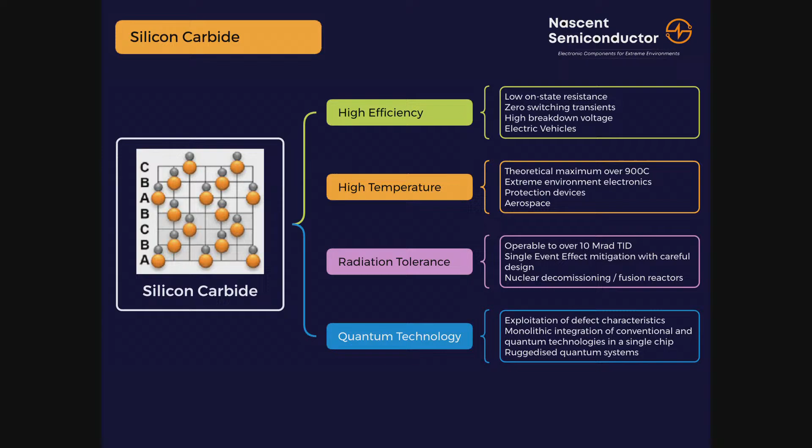And then, finally at the bottom, the brave new dawn, quantum technology. This is the only way you can put semiconductors and quantum together to make an integrated hybrid conventional quantum system, and we can open the door. Quantum comms, quantum computation, quantum sensing, all in one chip. There's no other material system out there that will allow you to do that.

So how? Well, this is how. Silicon carbide is a stoichiometric alloy of silicon and carbon. Imagine you're playing with your little Lego bricks as a kid, and it looks like the stuff on the top left. Now, obviously, silicon's blue and carbon's red - that's how I draw electrons and holes when I teach. In the top left corner, you see a silicon vacancy - there's a blue ball missing. And that shows up as a defect down here.

And this is... No, remember. Yeah, it's all right. Point the other one. Press that one. Point over here. Right. So about here, got really dodgy shakes this morning.

There's an energy difference in our defect between if we populate it and if we don't populate it. So we've got missing atoms like vacancies. There's also carbon vacancies, and we get extra atoms stuck in. Somebody was talking to us earlier about where the carbon goes in silicon carbide when you oxidize it. This is where it goes - it becomes a carbon interstitial and it wrecks your MOSFETs.

This is why silicon carbide MOSFETs are not as good as they should be. They've got all kinds of problems like threshold voltage instability and carbon interstitials. Some good work came out of Japan a few years ago on this.

We also end up with a situation of point versus extended defect, so you've got VC, VSI, and CSI VC - carbon silicon divacancy and a silicon carbon site with a carbon vacancy next to it. There's a whole zoo of these dratted things, and I spent 20 years of my life working in semiconductors

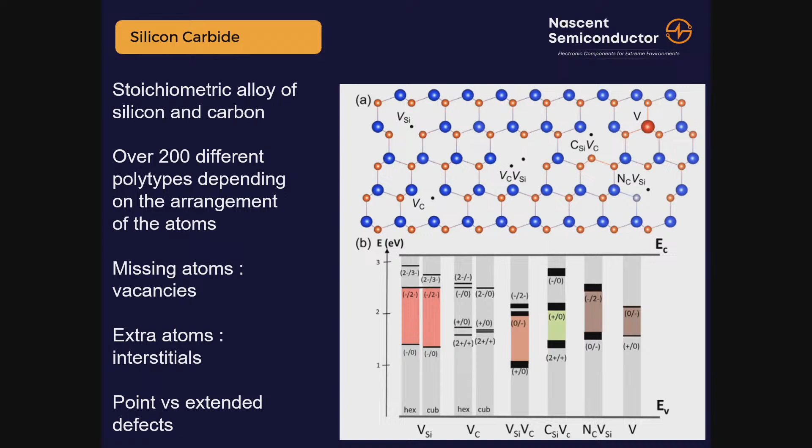trying to get rid of them. You put them in accidentally by doing ion implantation, contact annealing, and they'd be a pain. Now I've realised that I've been doing it wrong, and I should have been embracing these little darlings and doing fun things with them. So this is the quantum bit.

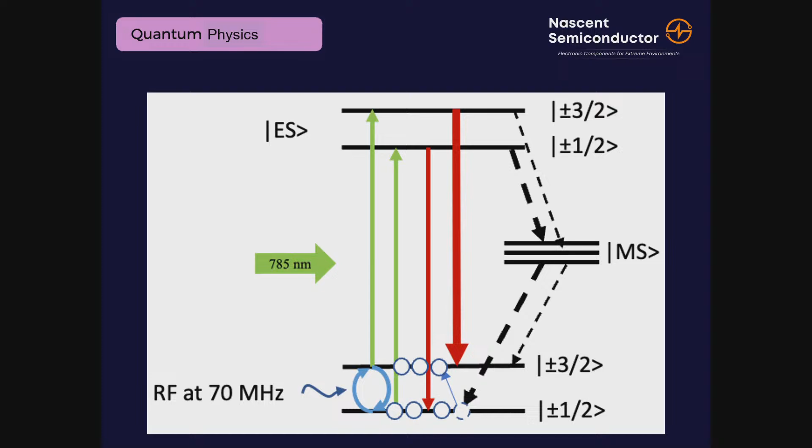Down at the bottom, you've got two energy levels, a spin half and spin 3/2 energy level, separated by a small energy that's resonant with an RF signal at 70 megahertz. We can shine a laser on this, a 785 nanometer laser, infrared, not much fun in the university because health

and safety people really don't like you. We pump all the carriers up to the top, so we put our defect into excited state marked by ES, and then it relaxes back. It's an unstable dynamic equilibrium.

There's two options. If you're in a spin 3/2, it drops back to the spin 3/2 ground state, the big red arrow, and that's the dominant transition. That gives out light - this is a photoluminescence type measurement.

If you're in the spin half, chances are it drops into this metastable state and drops back out at the bottom. This is a dark transition. We can't see it, we've got no idea that it's there. We know it's there, physics tells us it's there, but we can't actually see this. It's called the dark defect.

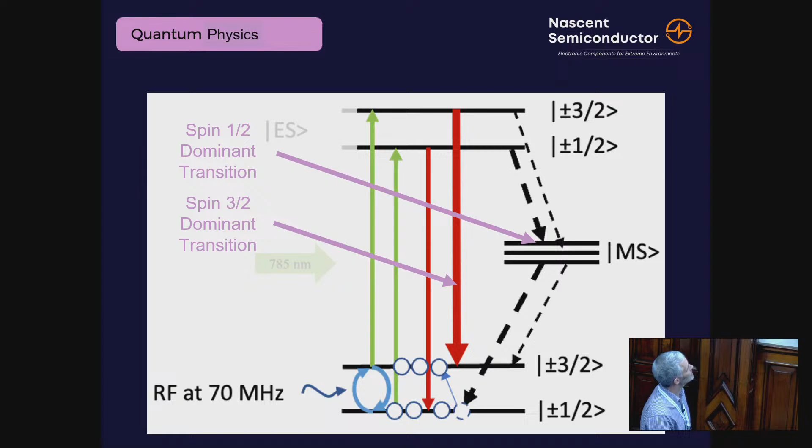So if we're doing this for real in an experiment, those are our two dominant transitions. In order to measure it, we want to populate the spin 3/2 state, so we apply this RF signal at the bottom. We sweep the RF field, and when we get to the point where RF equals 70, we see a nice big spike in our resonance.

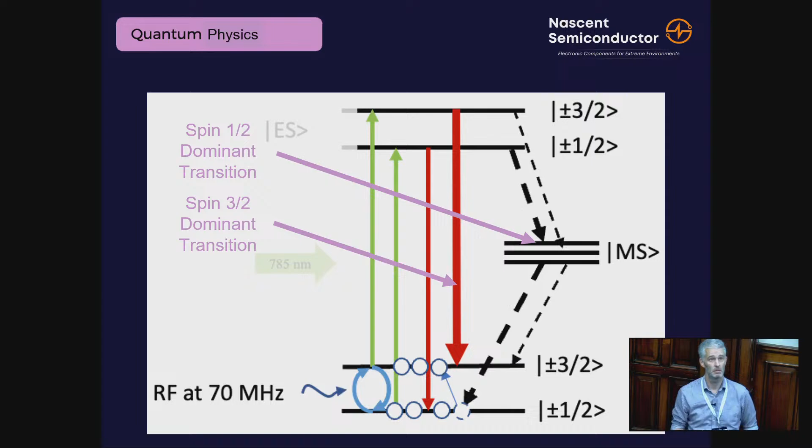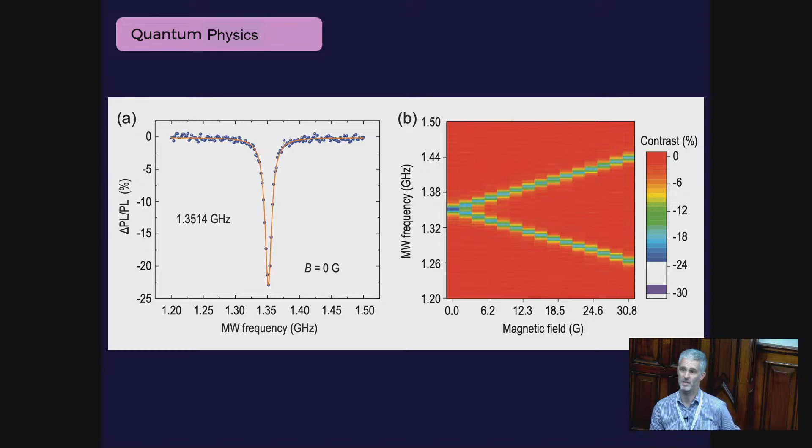What does that mean? Well, we've got a very narrow line width. Actually, if we optimize that, it's about 10 hertz wide at a gigahertz. It's a very, very sharp transition because it's quantum - you're moving from one quantum state to another.

What does that mean? Well, precision timing. We've now got a system where we've got a line that's very, very tightly defined. Very little uncertainty, no jitter.

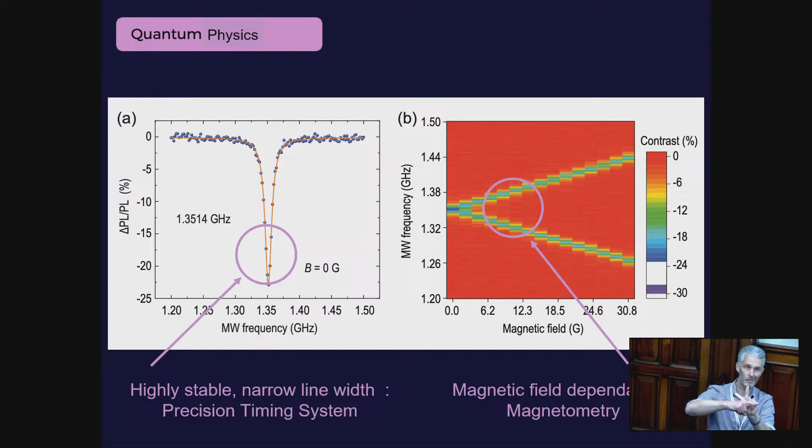On the other side, we've got magnetic field dependence - we've got a magnetometer. The clever thing about magnetometers on this is because silicon carbide is a hexagonal close-packed lattice, that direction and that direction are not the same. So actually with one pair of defects, I can look at that direction and that direction at the same time. I've got a perfectly orthogonal magnetometer with one sub-micron feature size, all on the same system.

Let's start with the laser, a little bit of beam steering. It goes through a dichroic mirror, large objective lens, onto our sample, which has got an RF signal across the top. We then collect as much light as we can through our high numerical objective lens. It's reflected back off here, and we send it into a single photon counting module.

This system is about a metre big. It's half an optical bench, weighs half a ton, and it's not exactly portable. The great thing about quantum is we need to get it out of the lab.

I once sat in a meeting with EPSRC, and one of the things they talked about is what we're going to do in the future. I said, we need to get quantum down to that. All I got from people saying, you can't say iPhone because it's trademarked. Yeah, right, point still there - when you can put it in your pocket, it works. That phone has more computing power than the US national government had when I did my PhD.

What do I use it for? Checking Wednesday's football scores, reading the news and watching Piano Playing Cats on YouTube.

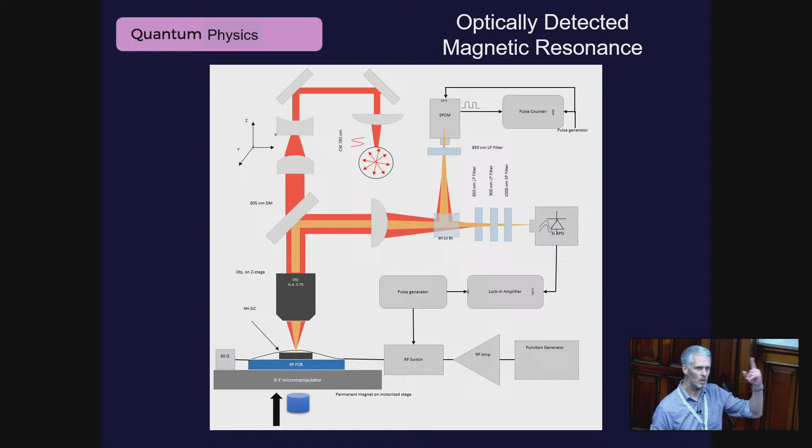What a waste. If we want to do something with this, and I want to set quantum free, we let the engineers in.

And we look at that and say, yeah, okay, you can do it optically, it's beautiful, it's wonderful, it does all this stuff, but you can detect that electrically because you detect the electrical transitions and you can do this. You can actually get a current out of it. Oh, hang on, we've got a current, so we can put an amplifier on it. And as soon as we do that, we don't need all this ancillary stuff.

Try that again. No, go the other way. All this, I'm used to working in the university where I can actually reach and point at the board, in case you're wondering. You don't need all this ancillary stuff up here.

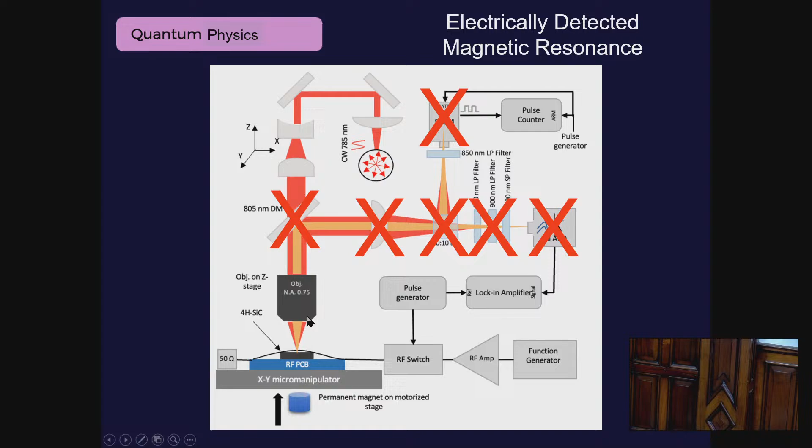All I need now is a laser fastened into an objective. I could do this with a fibre optic laser, and actually I put an amplifier across the back of this. I can build that RF generator on chip. I can build that amplifier on chip. I can't do the laser. Silicon carbide doesn't do very well with optics. But everything else you see on there will fit on one 3mm square piece of silicon carbide.

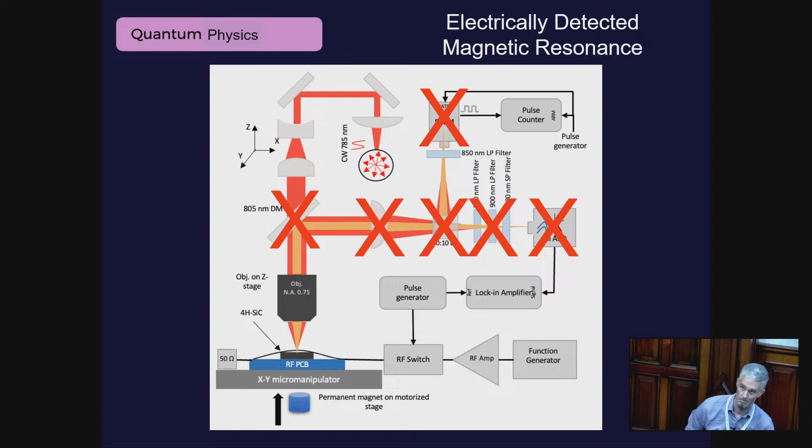I've got a magnetometer in my hand that will fit in your iPhone. You can't do this in any other material system.

What does this let us do? Well, once we get hold of this, we can build a magnetometer. Well, just kind of showing you that. A little hand wavy, but it's there. And we can do picotesla per square root hertz. And the main interest in this at the moment is anomaly detection.

If you don't read the right type of novels, this means detecting other people's submarines where we don't want them to be. That's basically an anomaly. We can do single photon generation.

Okay, so if you want to go out and do comm systems and things like that, this technique will also produce a single photon system. So do other systems. This is not particularly unique to us.

Position, navigation and timing, atomic clock. We can build a fully ruggedized atomic clock that you can drop, bounce, throw around. I watch Paul laughing now. And it will still work. You can't do that with standard quantum technology. It's very fragile. Our stuff, yeah, not a problem.

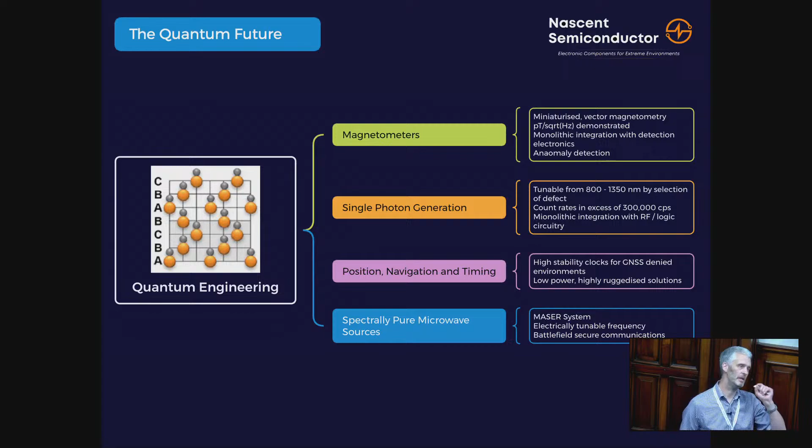Spectrally pure microwave sources, building masers, and there's a lot of interest in that for things like battlefield secure comms. You've got a very spectrally pure microwave source that you can tune electrically. There's a lot of interest.

Where does that bring in us? So a couple of moments just advertising us, because frankly, we're wonderful. We're doing magnetometry, we're doing a lot of work in position for GNSS denied environments.

There's a lot of money at the moment with the UK government. Sovereign supply chain, what happens if GNSS is turned off? I had to explain this to my son on the way home last night. The trains stop. Well, okay, I came up on Northern, that's not a major threat.

Navigation, and it's not about Uber, and it's not about Domino's, this is about everything else. Bank transfers, national grid synchronization, they all work on atomic clocks. And in case you're wondering about the railways, it's the signalling.

And one of the comments from somebody is, if you work in distributed sensing, the person who knows the time wins.

Timing, comms, training. Oh, the bottom one. Just to go back to some of the things that have been out there.

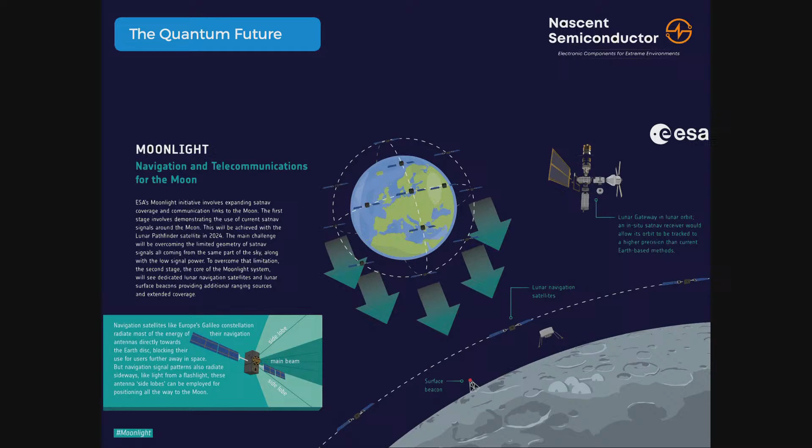We want to go to the moon. There's a few people I'd like to send one way, but we're off to the moon.

What's the time on the moon? It's a facetious question. I can see Sandi Toksvig now with her thumb on the button in QI. I go, what's the time on the moon? If we want to do autonomous landers, the Chinese have just landed on the dark side. It's a fantastic result. We need to do autonomous mining, autonomous landing. We need power networks. We need Uber. Again, you know, how are we going to get around to the moon without Uber?

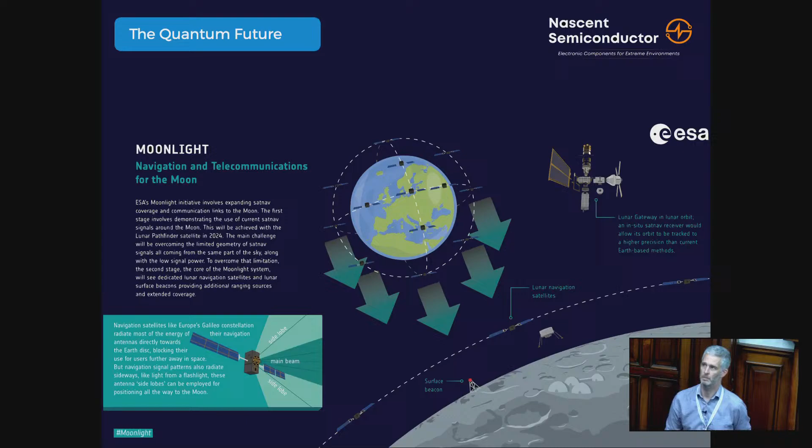We can't do this unless we have a timing system that gives us navigation, that gives us position. We've got a fully ruggedized, landable system that you can put on the surface of the moon. It's also small and low power, so you can fly it over the top of the moon.

But we'll come back to skills. We're working with Durham, which is my part-time job, to produce targeted training for engineers looking to develop quantum in the real world. Over the years we've developed training for people in semiconductors. We can start with GCSE chemistry and take you to PhD level, in 3 days. We're now taking this out, and we're going to teach engineers about quantum. Why does it matter? What does it matter? What will it do for you?

Our first product on this will basically be quantum for managers. Why does it matter to your company? What should you know about this? When the engineers use the word, what do they mean? We're taking bookings - obviously a little bit of a sales pitch there.

So where are we? Well, the integration of quantum with wide bandgap semiconductors is a unique opportunity. There's no other material system out there that can do this. I've been looking to do this for a long number of years - checking the audience. When I worked for my previous university, I tried to get this off the floor and it didn't work. So the technological maturity of silicon carbide is really quite good. It's not silicon, thank God, but you can buy wafers, you can do processing, and now we can integrate the clever stuff with it and we can still put it through a foundry. We can go to a foundry in the UK and get them to manufacture quantum parts.

Miniaturized, ruggedized systems are being developed that will do everything we can imagine. And I'd like to finish by thanking the giants upon whose shoulders I stand, some of which are at the back, and some of which thankfully are not. And with that, thank you very much.

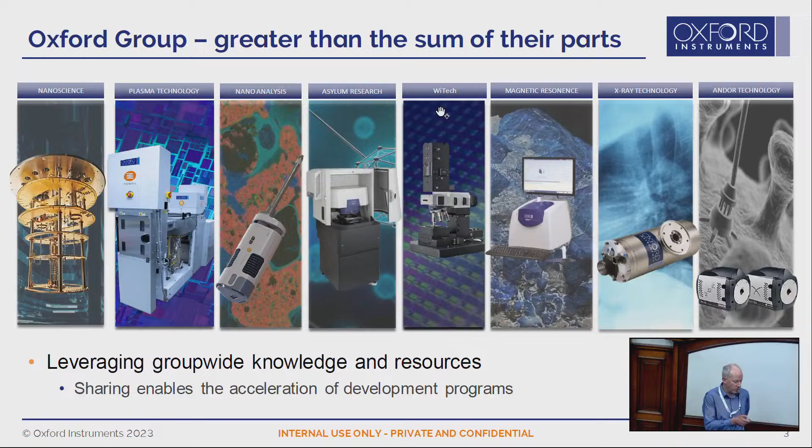The Plasma Technology division here is also involved in the semiconductor areas, particularly the nanoanalysis division, Asylum Research, WiTech, and I'll talk through some of the products that they have that are relevant for semiconductors.

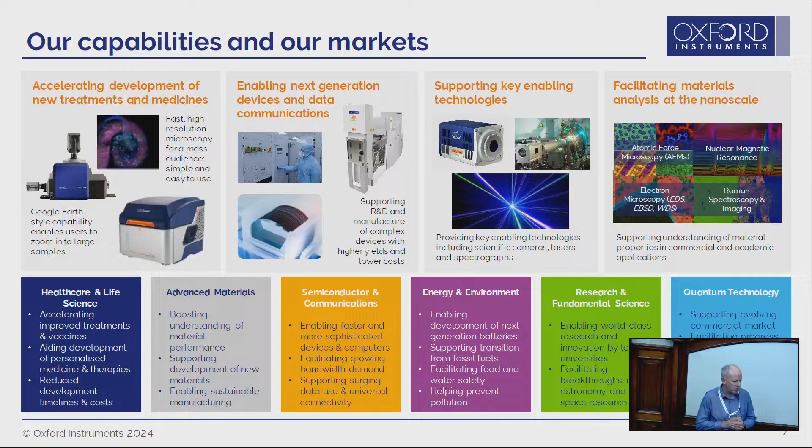The Plasma Technology division is really focused on enabling next generation devices in semiconductors, and I'll go on to talk about those types of devices that our equipment is being used to fabricate in the next few slides. I'll also talk a little bit about the nanoanalysis division and the types of analytical instruments that are used.

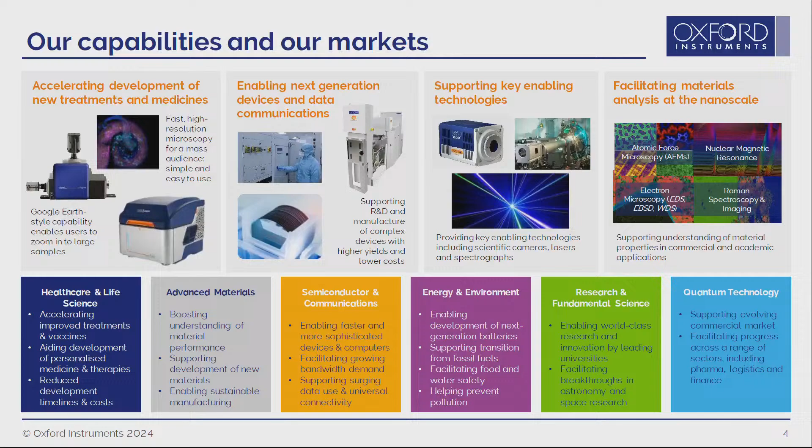Overall, Oxford Instruments' vision and view is enabling a greener, healthier, and more connected advanced society. Semiconductors is a key part of that. Quantum is already mentioned, but really across all these areas, the fabrication equipment that Plasma Technology is making is being used for.

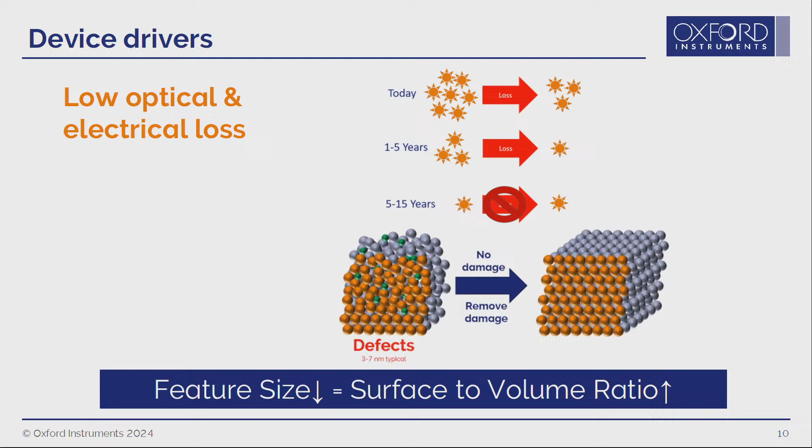So the different solutions that our equipment and our processes are for: I mentioned damage removal, also interface optimization - etching an interface, cleaning an interface, removing the surface layers, and then putting down a passivation to ensure we get a high quality interface.

We're also seeing demands for ever more advanced architecture features. I mentioned augmented reality - they're looking at a slanted etch, but also we see high aspect feature etches really trying to control the etch profile, the features, and then as these features get ever more complex, trying to deposit and coat these different feature structures.

So I mentioned the four main areas that we're looking into: discretes, devices, opto devices, 2D materials is also something that's very important, next generation R&D, and then also quantum technologies.

And all of these, the main fabrication technologies that we are focusing on is atomic scale processing - atomic layer etch, atomic layer deposition, plasma etch and deposition, and then also ion beam etch and deposition.

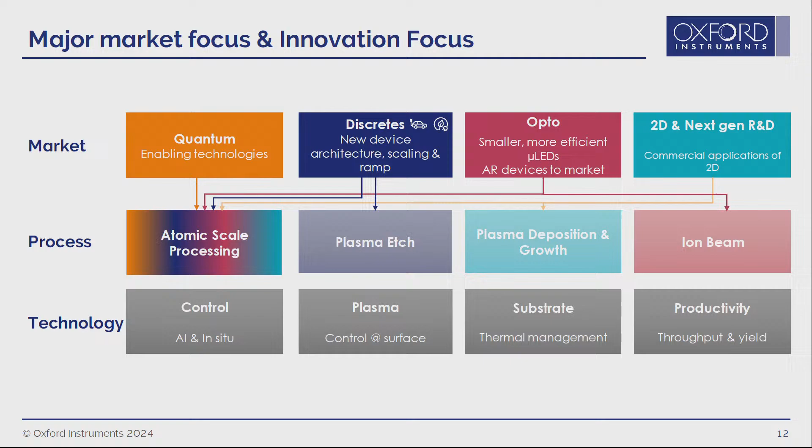And what's really important that we're seeing is control, and looking at use of AI and in situ monitoring, combining that with AI to achieve the control of our processes, controlling the plasma at the surface, and really managing the thermal budget when we're processing - all of that increasing productivity, throughput, and yield.

So a couple of examples. We've talked a bit about wide bandgap semiconductors, so gallium nitride, silicon carbide. On the left here, we have two different types of gallium nitride devices, normally off devices - a p-GaN HEMT structure and a recess gate MIS HEMT structure.

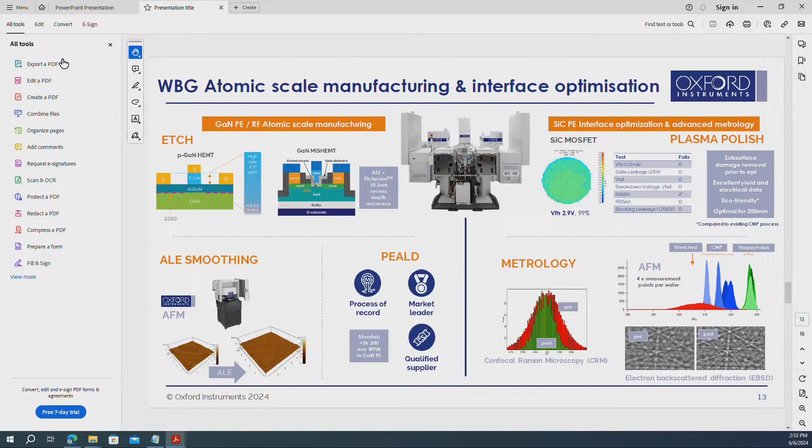And here, as I mentioned, the... oops, sorry. Did I put that back into... thank you.

So here, as I mentioned, in this recessed gate structure, we are etching a recessed gate structure of just 20 nanometers. And here, the control of the depth becomes very, very important when it's just a 20 nanometer etch. As well, when we're doing that etch, we need to make sure that the surface quality, the surface roughness and the surface quality, is as high as possible. And there we are choosing atomic layer etch to get both this control and also a very smooth surface.

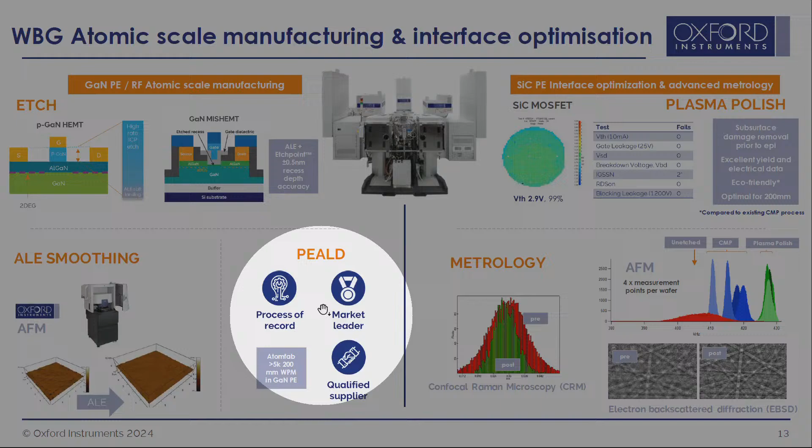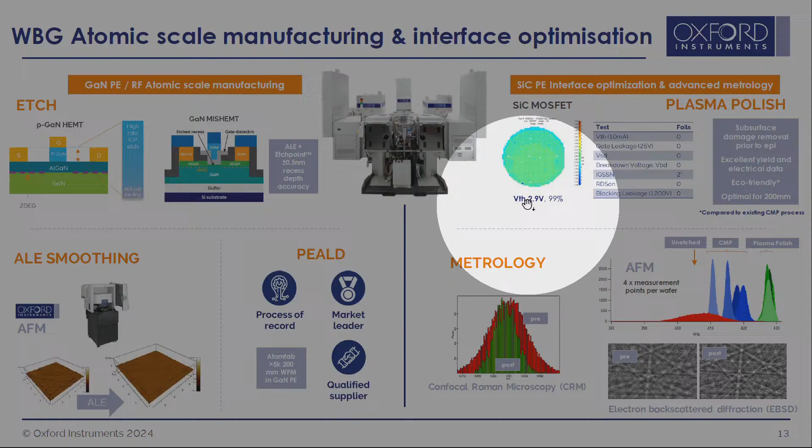And then once we've done that etch, we use plasma atomic layer deposition to put a passivation layer down. This is for a kind of RF type GaN device, or alternatively also smoothing in a p-GaN HEMT. On the right is a process we have for silicon carbide, an alternative to using CMP - etching the surface with a plasma to effectively polish the surface in a similar way to CMP, but removing the surface damage.

And we've characterized that both electrically, making devices with partners, but also using metrology such as Raman spectroscopy looking at the density, AFM looking at the surface roughness, and EBSD looking at the crystallinity of the surface - combining all these techniques to really understand the surface and how that impacts the electrical device results.

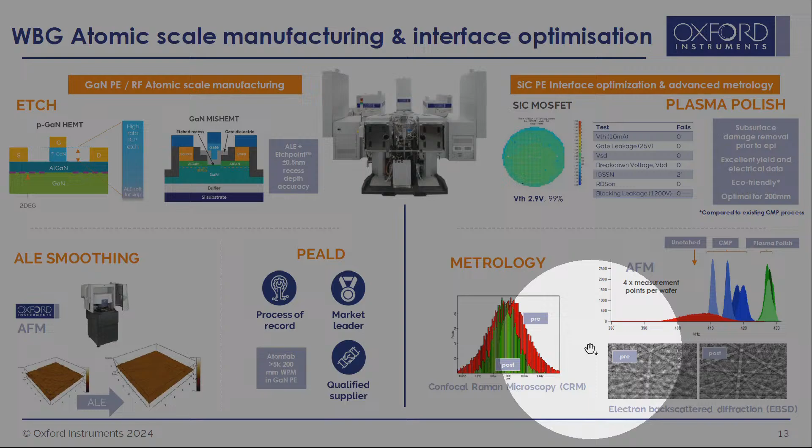This can be a very time-consuming process - to fabricate a device can take several weeks, months even, and is very costly. So we're always looking for short-loop methods, and hence the focus on the metrology to really directly and rapidly characterize the surface so we can try to understand what the impact will be on devices.

So I mentioned there the example of surface smoothing already, and that is where an etch can modify the surface of the device and of the structure, and really where we're using atomic layer etch to get that best quality of interface possible.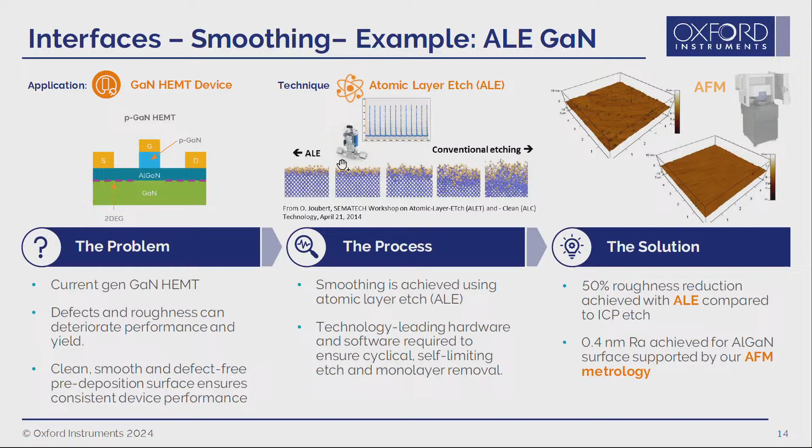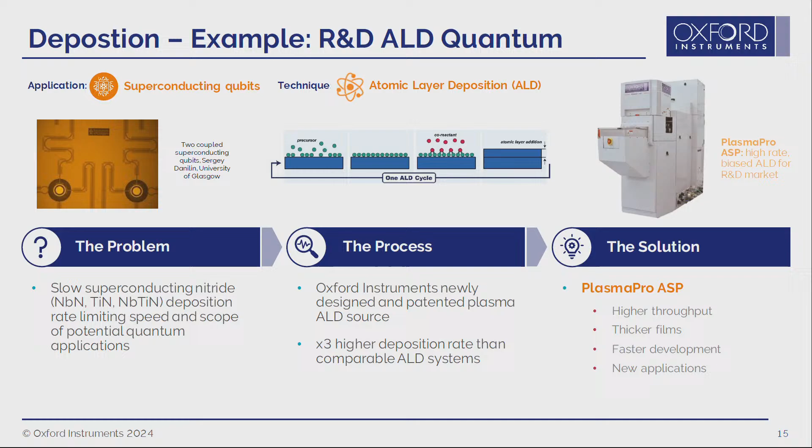So really different demands in terms of the structures and what it is that we're trying to etch.

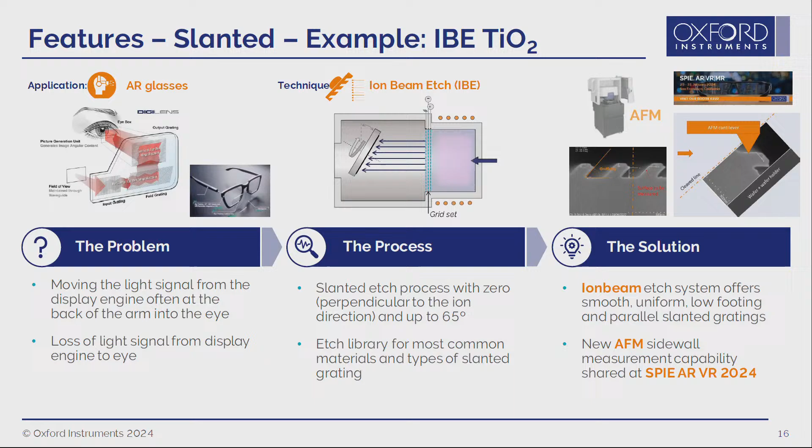So a summary there: we see the trends for the future of surfaces becoming much more important - surfaces, interfaces, looking at damage removal, interface optimization, and etching and depositing onto ever more complex features with higher requirements for their fabrication. Okay, thank you.

Time for one quick question before we move on. If everyone's... No? Okay, brilliant, thank you very much.

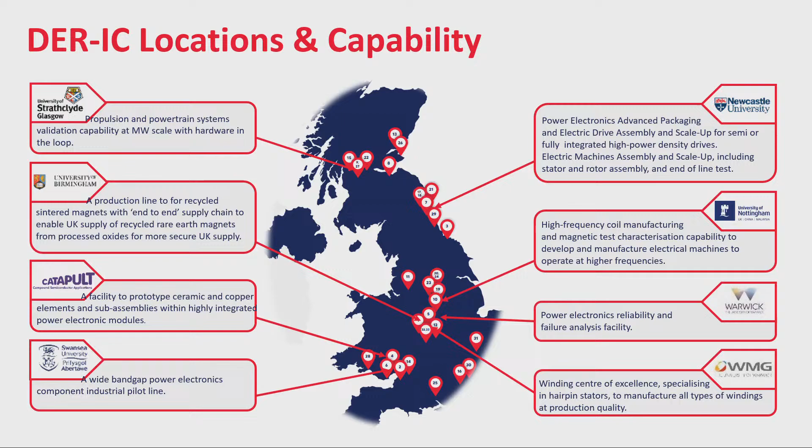In the northeast, we've largely got a power electronics packaging capability, and following that, we're able to take those packaged devices and integrate them into drive systems. We have packaging equipment which is industrial scale for packaging and also for surface mount PCB manufacture. If anyone's interested in how we use those devices, for example to drive electrical machines, we've also got capability to prototype, assemble and manufacture electrical machines.

The total investment to date has been around £45 million. The equipment we've got at our centre totals about £10.5 million. There was an initial tranche of funding, and we've just gone through the commissioning stage, and now we're starting to use that properly in anger.

Importantly, I'm also currently in a procurement phase. I have some additional funding, and I'm looking to spend that wisely. What I am here to do is support industry, not just nationally but also clearly in the northeast. It's great to build that relationship with the power electronics community and do as much as we can to support industry in the northeast. I need to make sure the centre I lead is as useful to as many people as possible. So because I'm in procurement mode, if people have particular needs for manufacturing process development or capacity, I'm all ears. Let me know, and I'm happy to consider suggestions as to how best to spend the money.

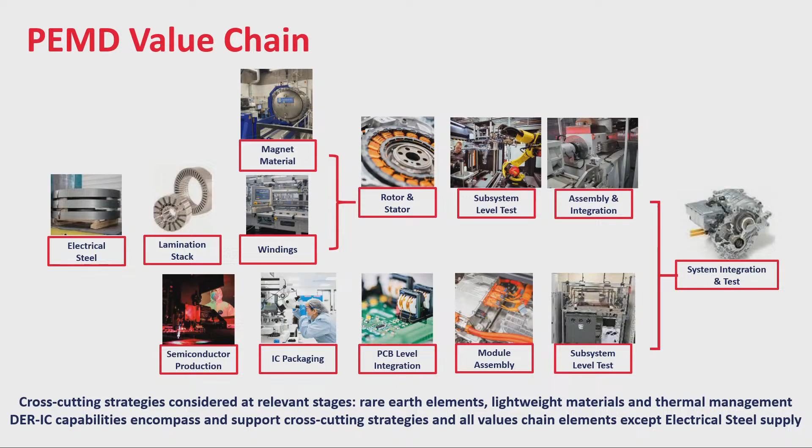If you look at what we have at our centre, we're located opposite the Nissan plant in the old SASME building. We might be moving from there at some point, we're working on that at the moment. It might not be the best location for us currently, but we're considering various options. Our current location is at the SASME building.

What we have there is open access equipment and staff who can actually use it. You can see our team there, it's a modest-sized team at the moment. We're currently recruiting, and I'm sure those of you also trying to recruit will know how challenging that actually is, but we've currently got a couple of new senior engineers coming on board, and we're also looking to recruit more people, particularly for our power electronics side.

But don't consider this as being DER in the northeast. We're able to call upon all of our partner institutions, for example Durham University is part of the DER network in the northeast, Newcastle University is as well, a whole bunch of institutions. We're partnered with people like OREC and so on. There's a whole bunch of capability we can call upon.

And if we can't find that capability in the Northeast Centre, we're also a national network. The four centres work together very effectively, so we're able to piece together, if we don't have the capability, a complete capability across the network with the other parts of the community. So it's a modest-sized team as we can see, but we're able to call upon much more expertise as and when we require it.

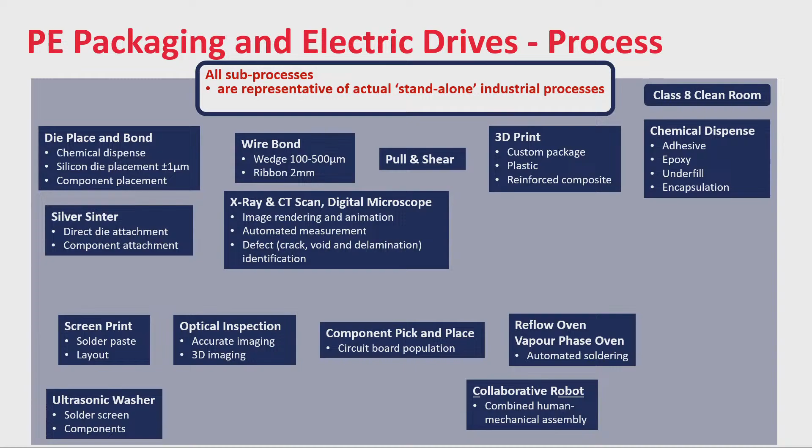Just to give a brief idea of where we are with our centre at the moment. Each of these boxes represents a bit of equipment that we've got. It's generally industrial standard equipment.

It's designed to follow on from where the CSA could take you in a device development. They're geared up to do just a few samples, whereas our equipment's specified to go into the hundreds of thousands of samples, if that's what we need. So it's proper industrial manufacturing equipment.

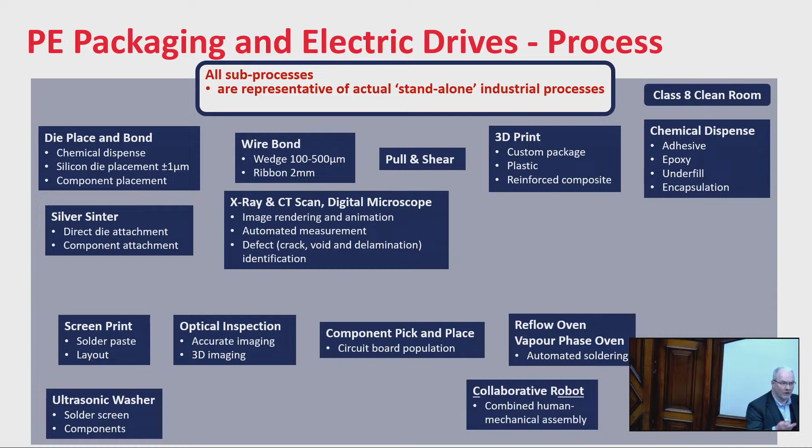These are the various different bits of kit that we've got and the various processes that we can play with if we're trying to help someone develop a manufacturing process. But the important thing to remember is that this stuff all fits together to give an end-to-end capability. The stuff we have at our centre is very much at the back end of processing.

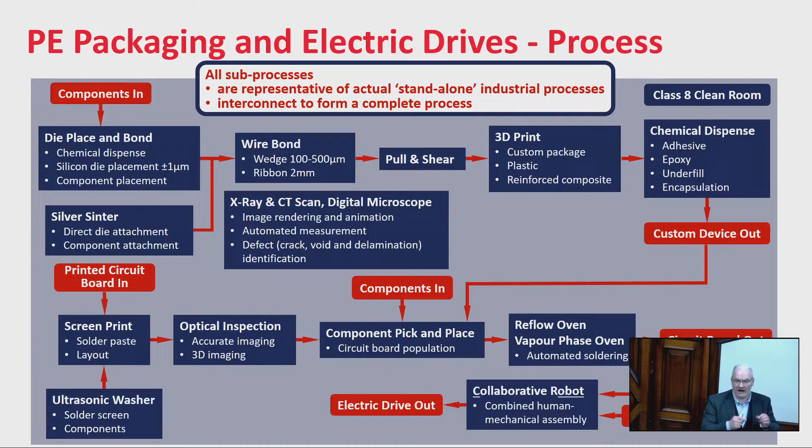We can't do wet processing of silicon, but if we're able to get hold of silicon chips, we can then package those and process those. We do have wet processing capability if we go back to our main campus and work with colleagues within our building there. So we do have capability to do that more end-to-end work piece as well, if that's what's required.

We've got some really nice diagnostic measurement equipment as well for examining our processes and confirming that we've done everything correctly. Currently we've got X-ray and CT scan, a nice digital microscope, and pull and shear testing. I'm also looking to bring on some more equipment later on, but I'll talk about that in one of the later slides.

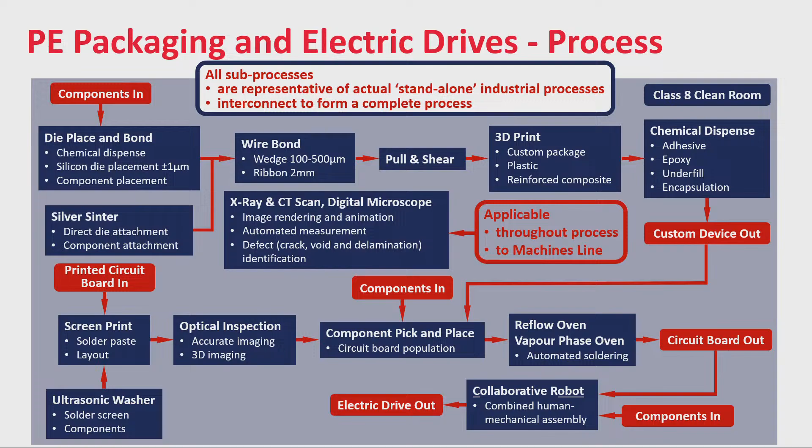And we're also bringing on board a power testing, power cycling capability as well. That should be arriving within the next few months.

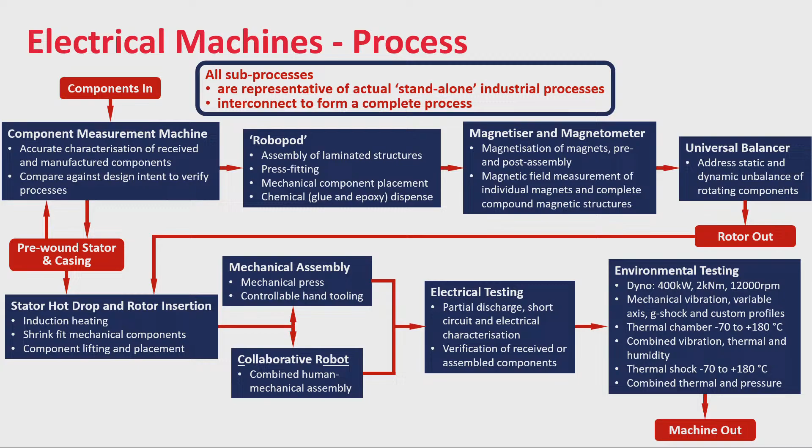Thinking about all of that, comparing with the previous version of this slide, a couple of bits have dropped out because you can't clearly do everything. But if you look at the bottom bit, which is based on our semiconductor capability, we think we've got pretty good coverage across the board of requirements there in terms of making a device, testing it, and getting it working.

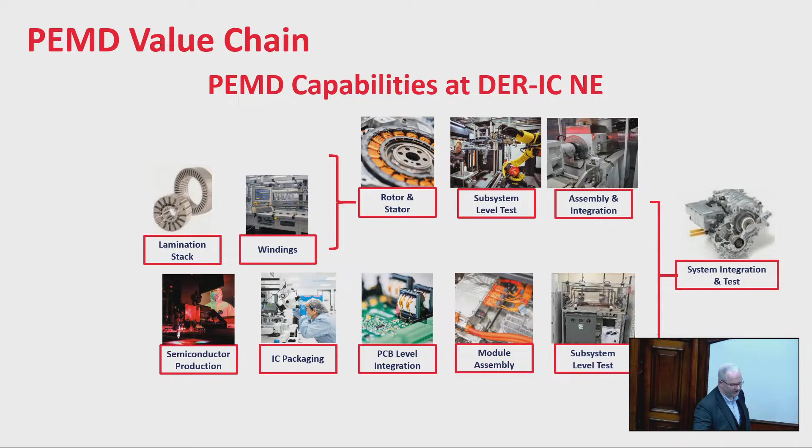Here's just some nice flashy pictures to give an impression of the kind of kit that we've got. And if anyone wants to come and visit us, please do. We're very keen to develop industrial contacts further, to help you come and see what we've got and find out how we can help you, and also for you to tell us what it is that you would need from a centre like ours.

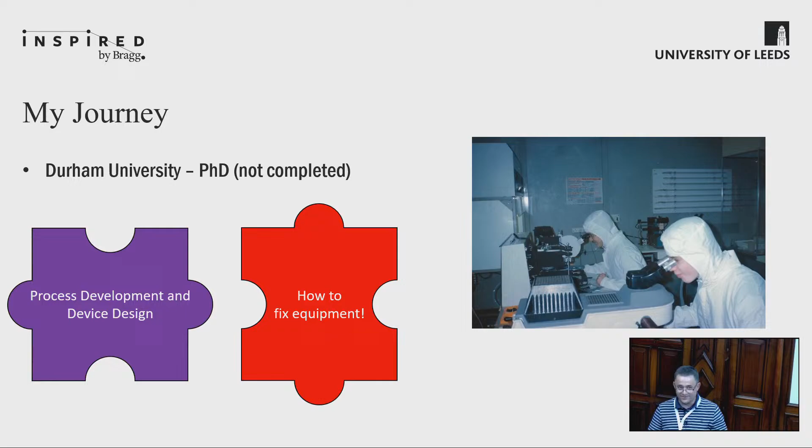So we were very much maintenance there. I went back to Durham, had this wonderful chance, device design, process development, and then a big thing for university clean rooms back then, how to fix bloody equipment, okay? How to, on a Monday morning, get it back to the state it was in on a Friday afternoon. I see a few of the current Durham students laughing at that. I'm glad to see it hasn't changed that much.

I then left partway through my PhD. At that point, Siemens was opening up on Tyneside. I got a very nice offer to go spend a year in Munich, working for the Centre for Process Support. It was a worldwide Centre for Process Support.

And the big learning from that was, alongside all the wonderful things they did, design of experiments, the chance to develop processes, work with equipment vendors on beta sites in terms of hardware and new chemistries and things like that. It was that influence of these people who'd been in the industry for 20, 30, 40 years and just knew everything, knew everybody and things like that.

And then went back to Tyneside for a short time before the inevitable being called into the canteen and told that the factory was closing. But in those months I was there, that was really good for troubleshooting, how to integrate, how to problem solve a line that takes 3 months to make a single device.

I then went down to GMMT in Caswell. Apologies if there's anybody here from GMMT in Caswell. No, good. What an experience. Oh my God, how not to run a clean room. And it was the complete and utter other end of the scale compared to what I'd seen at Fujitsu and Siemens. Don't ever have a clean room with a wooden floor that's got woodworm in it.

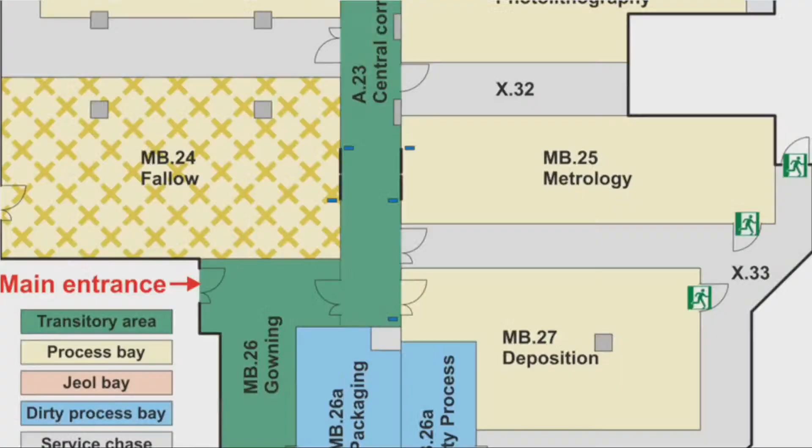We're based in the Sir William Henry Bragg building. It's a brand new materials building at Leeds. We have an 800 square metre class 10 clean room. I'm old school, class 10, none of these ISO rubbish.

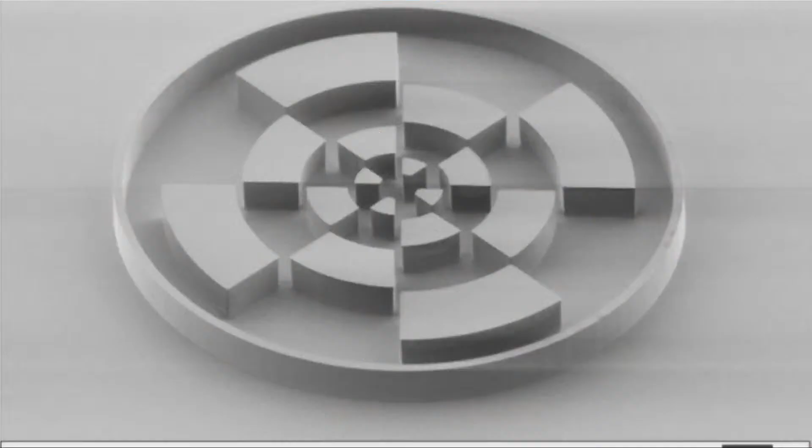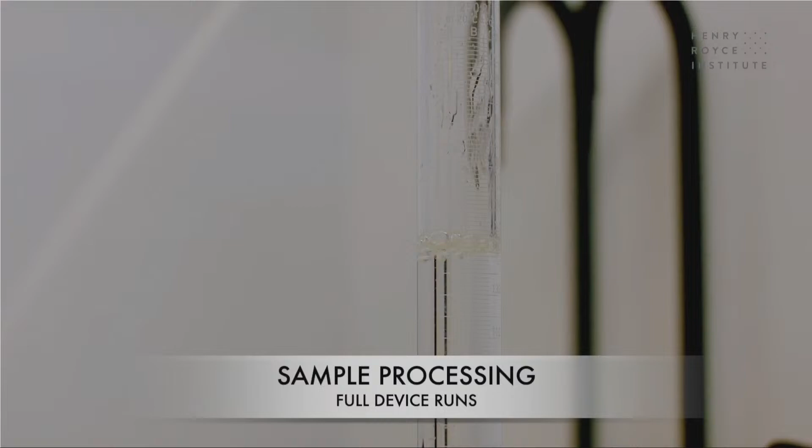We are full of the internal Leeds people, PhDs, researchers doing work there. We have lots of SMEs come in and use the facility. The big thing I'm involved in is the training. We do so many different levels of training, from individual equipment to 4 or 5 day courses. We're supporting production across the country, really - short loop runs, full device runs.

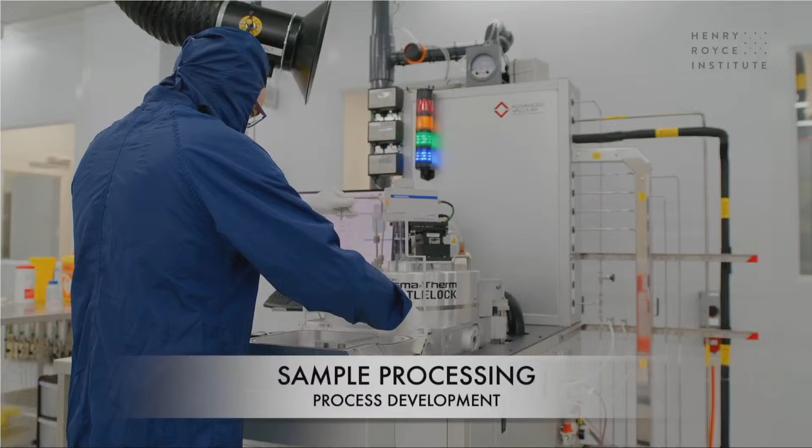We do process development. We're helping a few companies out that are building their own facilities but haven't quite got as far down the track. So the bloody motorcyclist turns up on a Tuesday morning, can you get these done by 3 o'clock, and they take them back and get it finished.

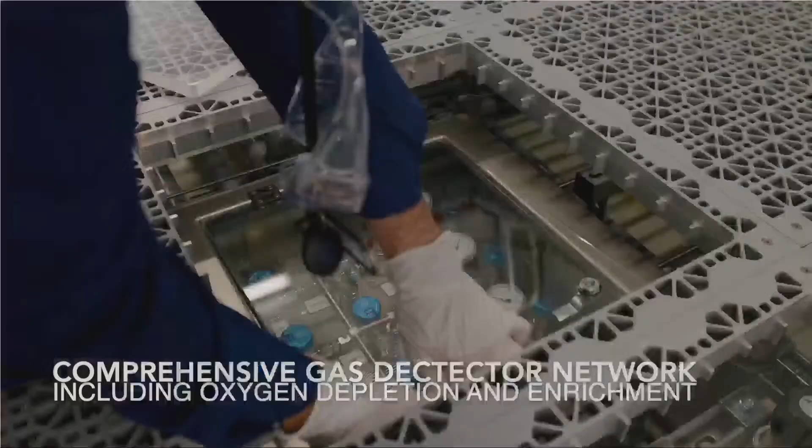The thing that impressed me with Leeds is that it's a miniature industrial clean room. It's been built really, really well, put together. Everything that you'd find in an industrial clean room is there in Leeds clean room.

That's almost like timed to perfection, wasn't it? Which is not how it usually goes. Oh no, don't start again.

So we opened in January 2022, going really quickly. About a £10 million clean room, we've got about £8.5 million of equipment in there. Oxford Instruments - where's he gone? Yeah, we've just bought £2.5 million worth of etchers off them that we're just installing at the minute. So we're still evolving our technology base.

So we're trying to inspire this next generation of engineers or clean room people, be they design or process. So this is Roundhay School - they came in a few months back. We did a miniature school logo.

There we go - inside the zero of 1903 we put another logo. They did the resist, the spin, the bake, the exposure, looked at it under my scope and absolutely loved it.

What more does a teenager want to do? Put a housefly in an SEM, look at its eyes and things like that. But again, it captivates them, it pulls them into wanting to come into the area.